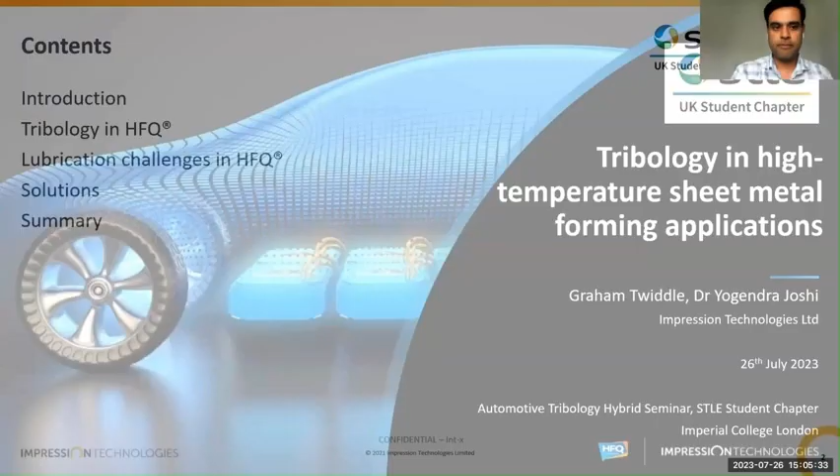So we will just give the introduction about the company and the process. Then we'll look at tribology in HFQ, which is our patented process. Then I'll share some challenges that we are facing at the moment. And then Graham will pitch in and then talk about solutions. And then we'll just give you a brief summary and open to any questions and discussions.

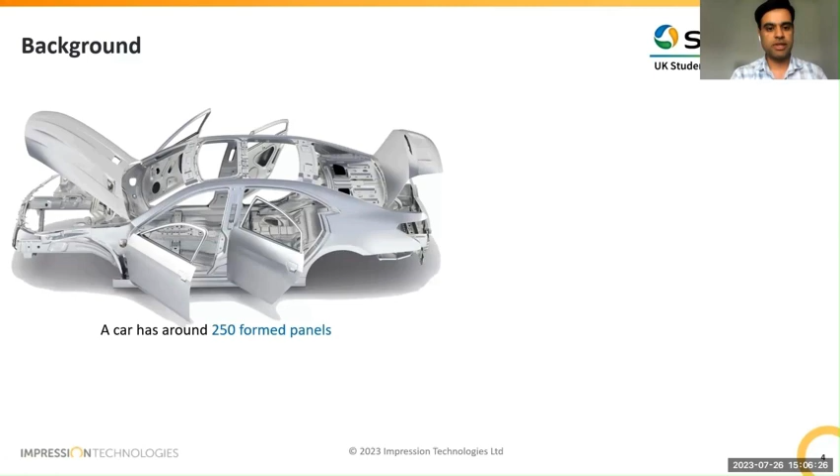So we have been talking about automotive tribology. So a car has around 250 formed panels. That includes what we see outside, as in bodies, doors, hoods, inners, fenders, plus the components that go on to make the chassis. And more recently, there have been a lot of discussion on how to make chassis for electric vehicles, which is a completely different game altogether.

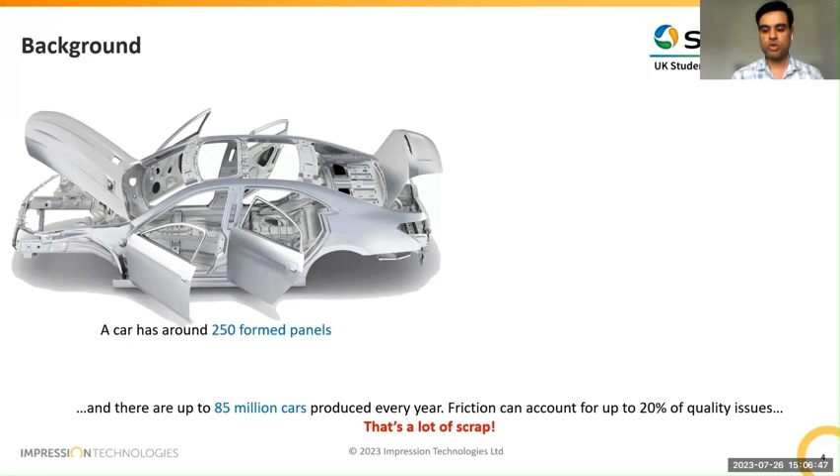On an average, there are 85 million cars produced every year. And like Ian mentioned on Josh's report, friction can account up to 20% of the quality issues. And the number is roughly the same in automotive stampings, but more so, let's say, towards 20 when it comes to these novel processes such as hot form components.

So as we are moving towards much more advanced processes, tribology becomes more important, and reducing the friction accounted losses in terms of scrap is also more important, more so in terms of sustainability, in reducing less material. There is no point in lightweighting and then using more in scrap.

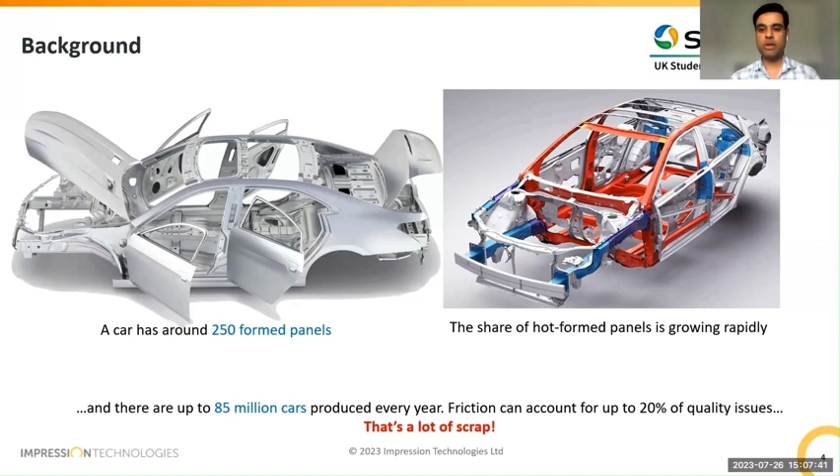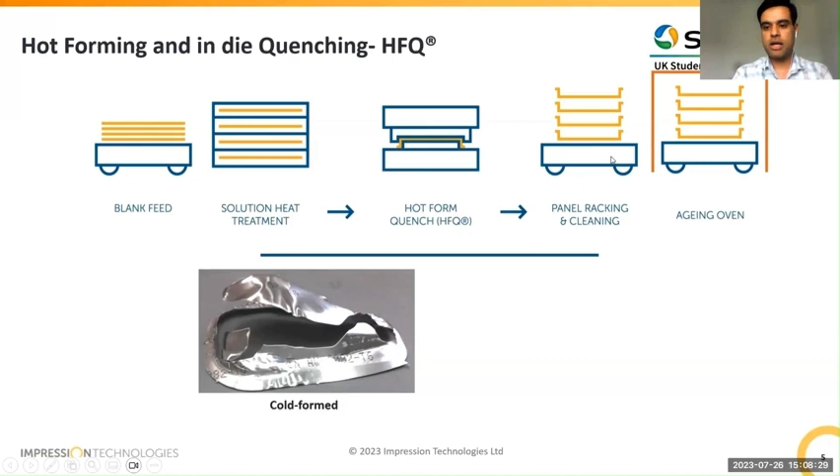Then the blanks are rapidly transferred to a cooled die. So there's a male and a female cavity. And then the press comes down, it forms the part. At the end of forming, there is a dwell of a few seconds to suck the heat out so that the part comes out at room temperature. Then the parts are cleaned, and then it goes into an aging oven where we get final properties.

And here I've just shown two examples: if I were to form this part cold using high strength aluminium, it splits into two. But if I do it hot through our process, we can make a very good part without any defects such as thinning or wrinkles.

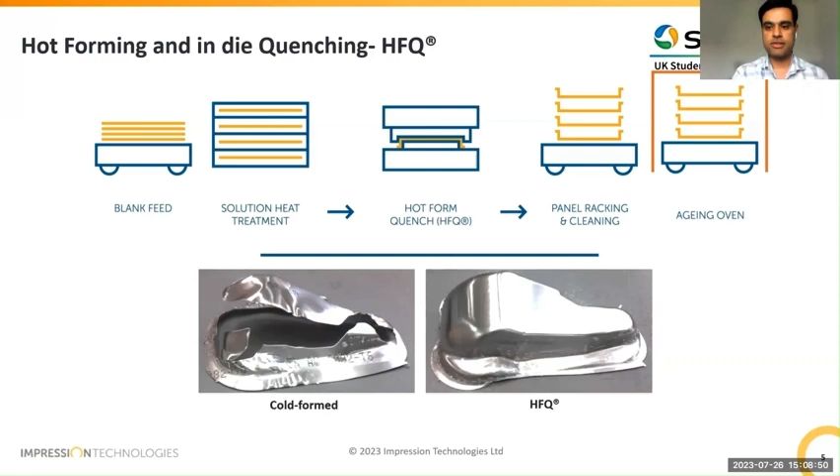So here I just want to show you the process in action. And this is in our site in Germany.

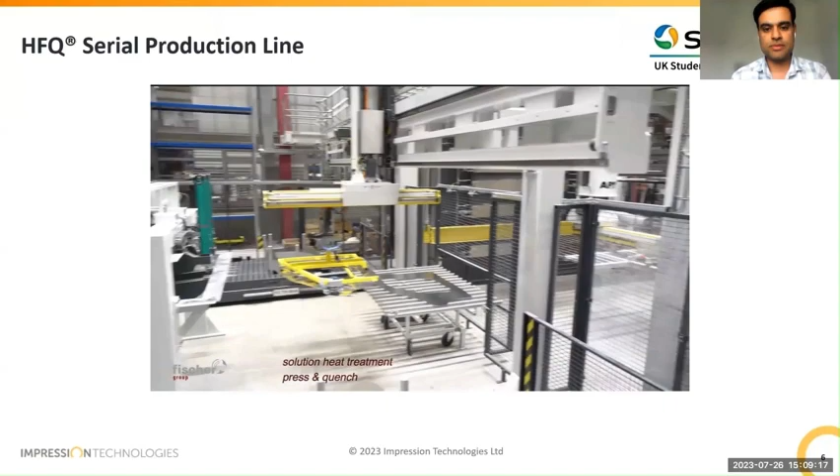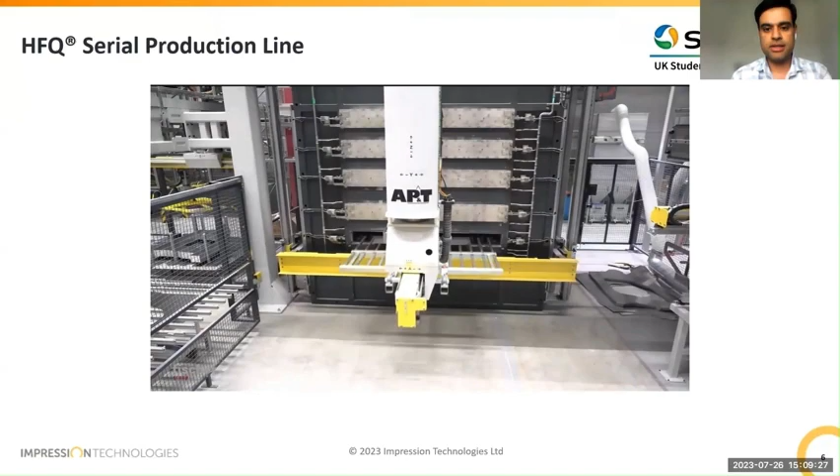This is where the blank is taken into the furnace for solution heat treatment. And the component being formed is a door ring, so that's where the door is latched onto.

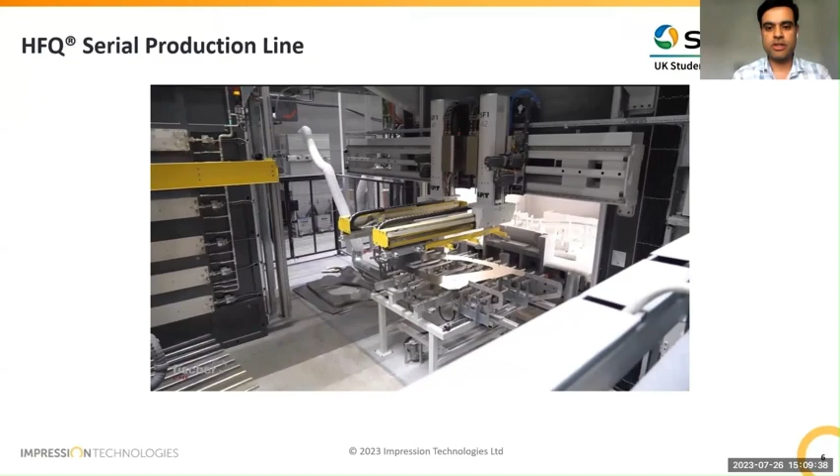Now it's out of the furnace and going inside the press in dies, and it's being formed. And after the quench time, it's removed from the press.

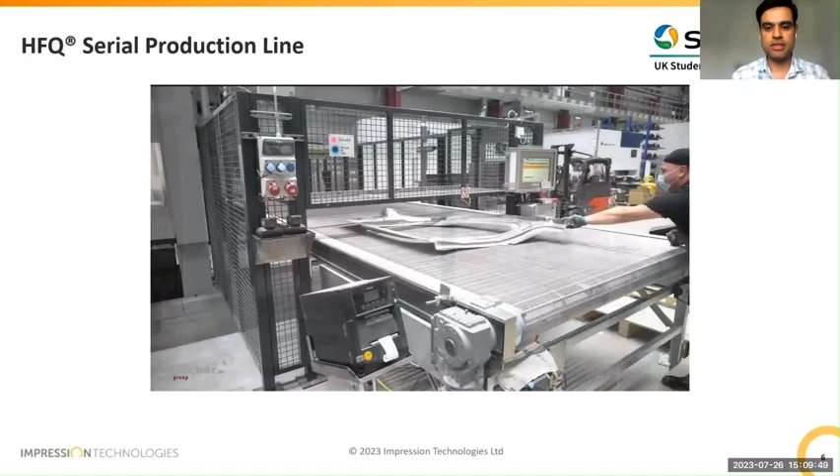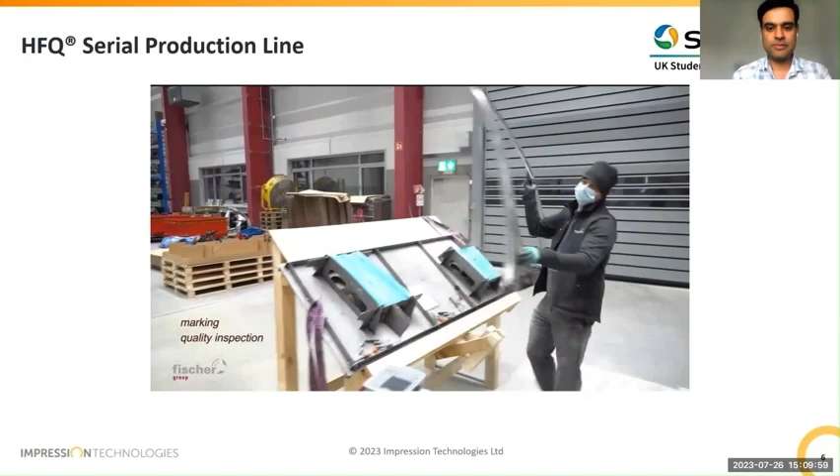It's visually inspected, and then it's stacked. That goes on for cleaning.

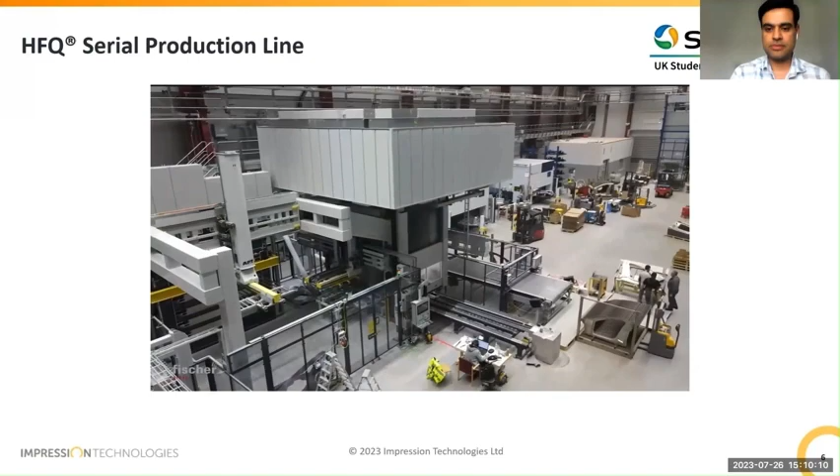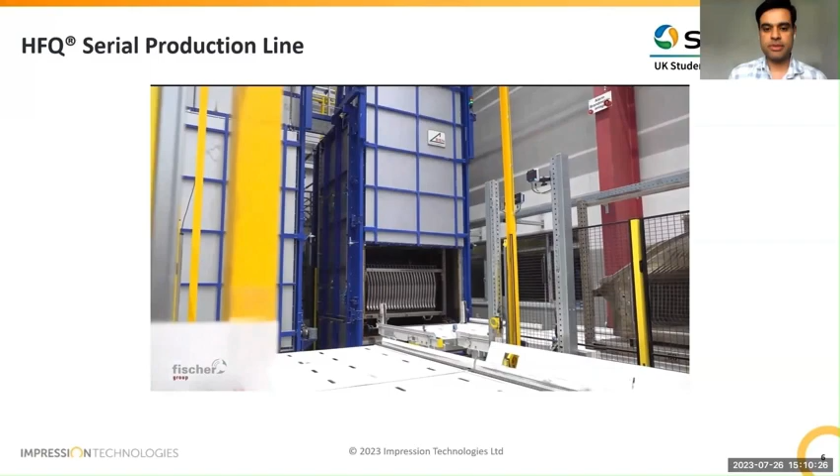Once it gets into the aging, where it gets the final property, so it's moving inside an aging oven. That's the advantage of HFQ, is you can tailor the final properties of the part depending on where it sits and what are the mechanical property requirements.

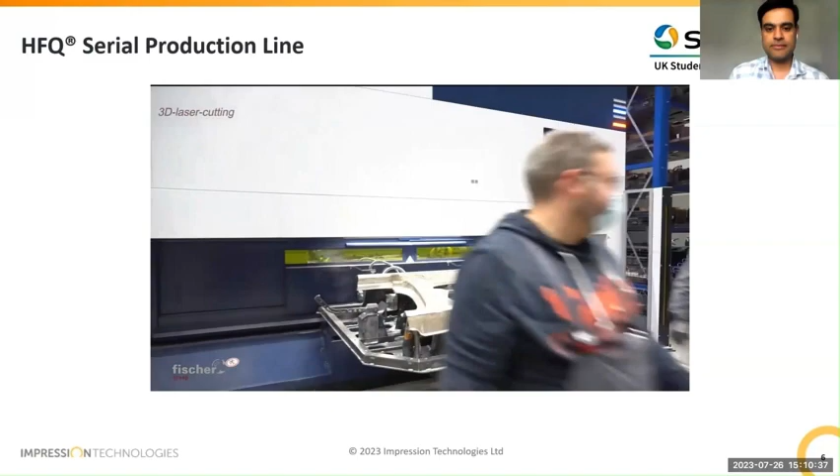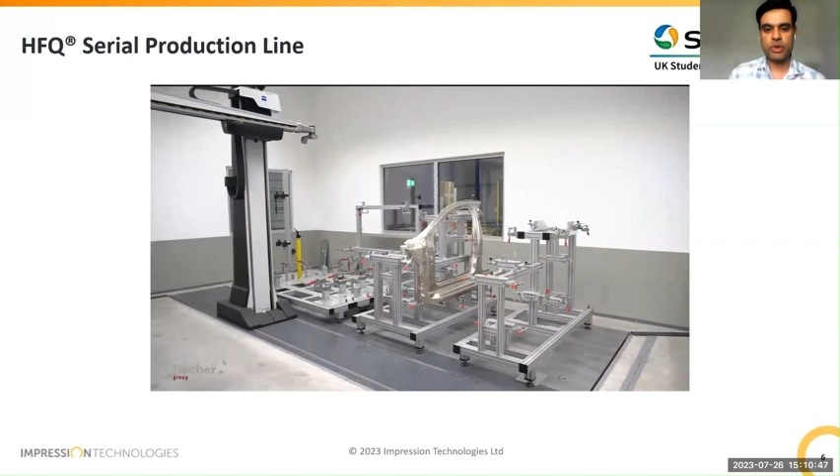And now it goes for laser cutting to the final shape. That's now cut and stacked, and this is how we measure. So this is where all the quality issues on dimensional conformance, thinning are being measured and captured.

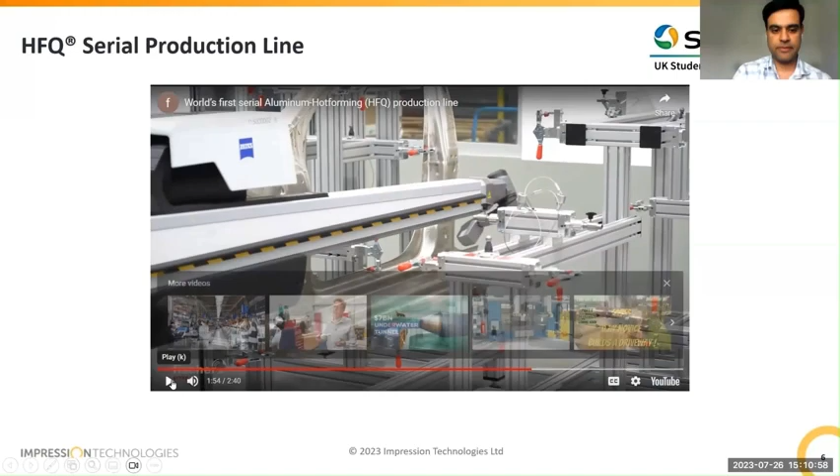Hopefully that gave you the idea of what the process is. So as a company, we only focus on ultra-high strength aluminum alloys through our patented process called HFQ. So far, we have invested 35 million in developing the technology. And at the moment, it's being used in companies like Aston Martin, Lucid in the US, and Lotus.

We have been commercially producing parts since 2016. So there are around 39 different parts being produced as we speak, and an annual production volume of more than 250,000 parts. And in terms of our interactions with global OEMs, we are working with almost every single OEM in aerospace and automotive you can imagine.

And we are based in Coventry, which is the automotive hub of the UK. And we operate from our technology headquarters in Coventry.

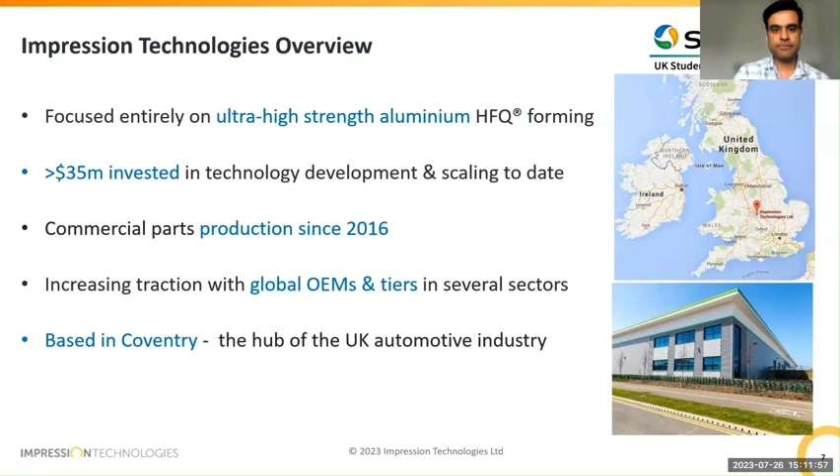So let's get into the interesting bit now. Let's talk about the Tribo system when it comes to sheet metal forming and especially HFQ. So there's a hot blank in between, and then the upper and lower tool, which are going to form the part.

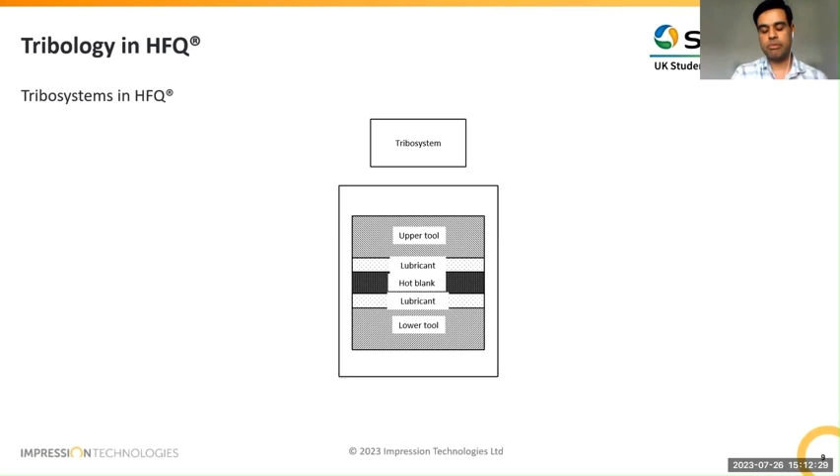In HFQ, we spray lubricant on the tool, so the blank does not come with any lubricant. And then the tools could be of tool steels, cast iron, or any other ferrous materials, which can also be coated with PVD coatings.

And then there are a plethora of operating variables depending on what type of motion, type of blank, process parameters such as forming forces, sliding distances, relative velocity. More importantly, the temperature of the die and the part. And both the blank and the die come with a certain surface finish. And then finally, the viscosity of the lubricant. So there are quite a few operating parameters that influence the Tribo system.

And the tribometric output, essentially what we all measure in tribology across different fields, is coefficient of friction and wear. But the friction coefficient is a function of the friction force, which is in turn a function of asperity flattening, adhesion, and shearing. Because we are looking at a high temperature contact, there's oxidation both on the steel, on the lubricant, and on the aluminum blank.

And there's also some dynamic effect to lubricants, such as squeezing out of the contact. And all these aspects together influence the contact conditions. And after we start pressing one part to the other, the entire Tribo system is then developing. So it's a rather dynamic nature of the Tribo system that we encounter in sheet metal forming.

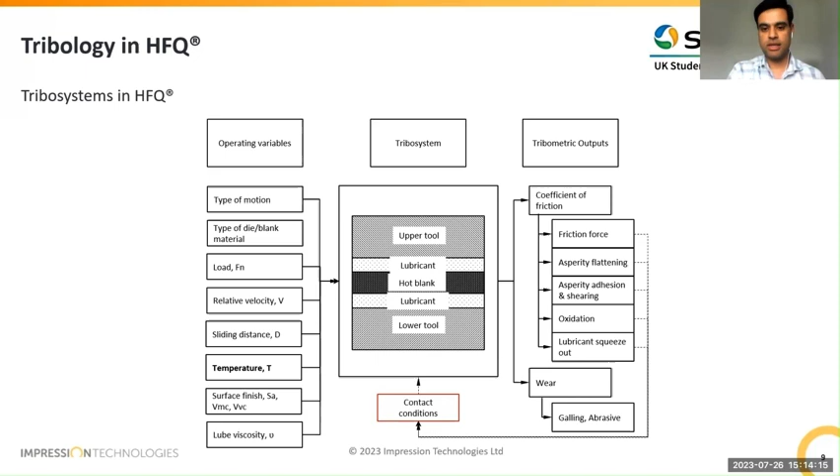So what is different to other tribology domains here is that the contact is non-recurring, that the blank and the tool only come in contact with each other once. Then there is an area contact rather than line or point contact. And the contact pressures that we experience are in megapascals, so let's say up to 50 megapascals on average, rather than in gigapascals. So the contact is very different.

And so what happens on a micro scale is I've tried to explain here. Talking from left to right, so you have only one side of the contact. There's an aluminium oxide layer. So imagine if an aluminium blank is being solution heat treated, then the oxide layer, there's an oxide layer growth that is happening, and then that layer is also porous.

When the die comes in contact with the aluminium blank, which is not lubricated, then there's an exchange of lubrication. And then when there's sliding action, when the part wants to form, then there are a lot of things happening at the same time. There is breaking of the brittle aluminum oxide layer, which can lead to extrusion of the base or softer aluminium alloy, which then can come in contact with the tool steel or the tool surface and get, let's say, chemically or mechanically adhered, which is galling.

And then there are some broken off abrasive particles of aluminium oxide or of the tool surface as well, because aluminium oxide is the second hardest material. So it can also wear and remove particles off the tooling surface. So an entire contact is evolving as we are forming.

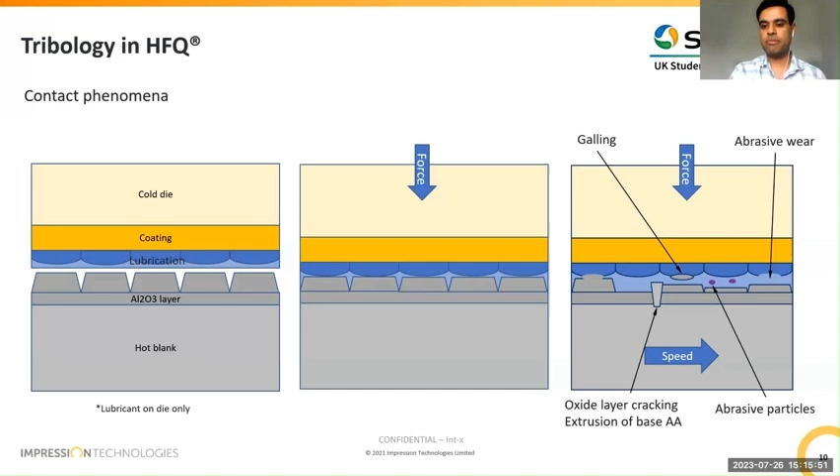And at the same time, the blank is cooling and the die is gaining temperature. So again, the temperature exchange also affects the rheological properties of the lubricant, which in turn changes what is happening at the contact. And all of this is happening within less than 1 second.

So I'm just now trying to make you more aware of what challenges such a contact can bring in. So the first challenge is the evolution of contact and friction. If you look at a Stribeck curve, which we all know, it divides into 3 lubrication regimes. In sheet metal forming, we have these parameters called L1 and L2, which is an extension of the current Stribeck curve, but we account for surface finish in it. So we typically only operate in boundary and mixed lubrication regime. We rarely go to hydrodynamic lubrication or EHD in that regime.

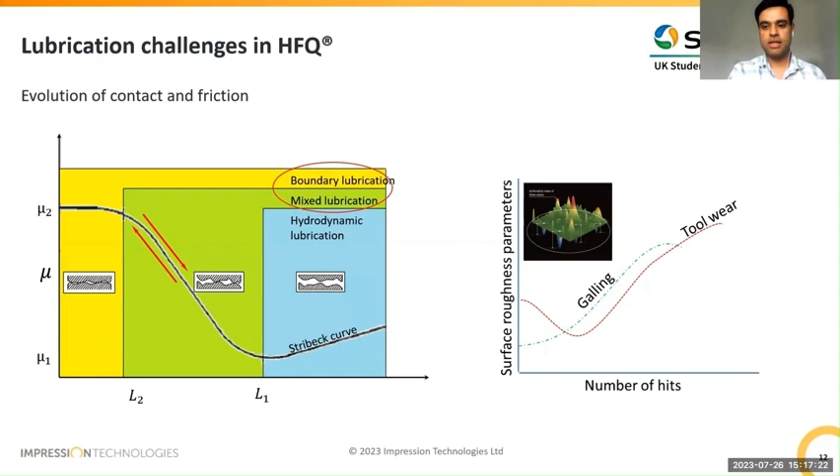But what can happen with the contact that is constantly evolving is, depending on the lubricant, the type of aluminium blank, and the forces and speeds that are used, the friction can either increase or decrease during that contact. And that is a dynamic nature that is very hard to predict for some tribo systems. Then, as we keep pressing the parts, let's say we press 4,000, 5,000 in a production run, galling, which is adhesive wear, also kicks in. Then tool wear also kicks in. So even between the number of hits and time over the production, the contact is evolving. So the friction is evolving, the contact is evolving. So how do you then quantify a system like this?

Then the other challenge is what experiments to conduct. If you look at a part being formed, as you can see here, there are different types of contact. There is bending over tension, there is sliding, there is bending and unbending over a feature, and in the die gap there is ironing. So there are around 9 tests to characterize what is actually going to happen while forming just one part. And all of these are still macro scale, and they don't really represent the real production conditions.

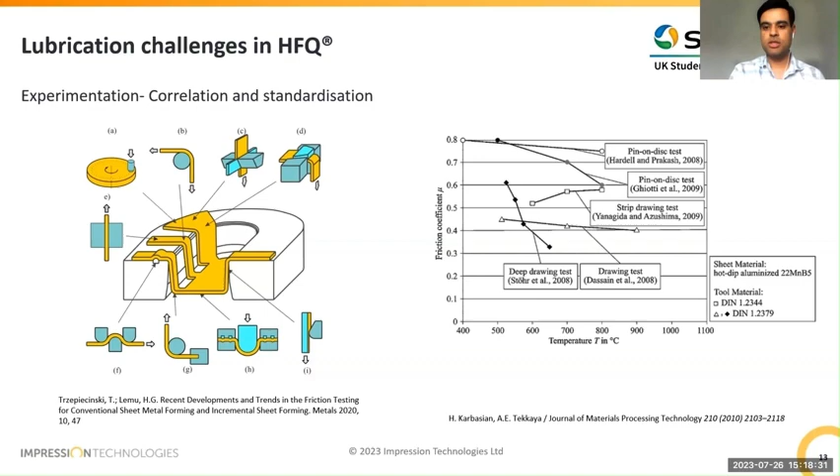So which tests to use to quantify what is really going to happen in production is still a problem. Then on the right, I've shown some research that has been done on steel, in which different universities and authors have tried to replicate each other's tribology tests. And what you can see here is that no 2 tribology tests in this field are repeatable. So then what data to trust and what tests to trust?

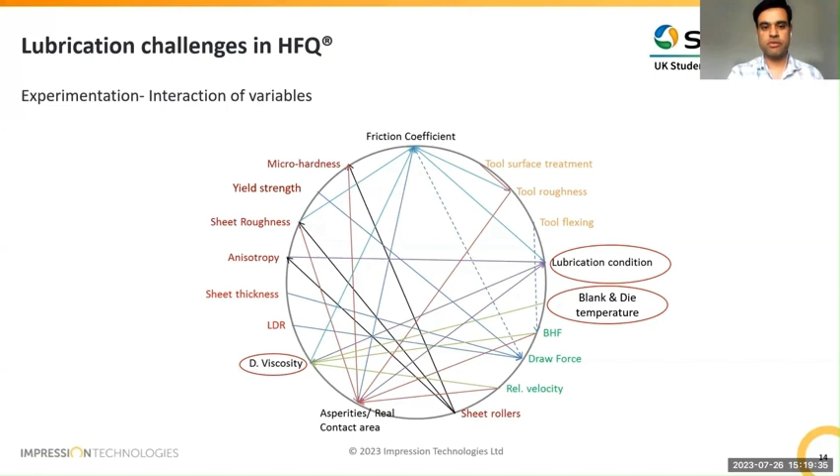So that brings me to what should be the properties of the lubricant. The three most important properties, which are probably common with lubricants in other fields in tribology, start with frictional behavior. So we want the friction to be predictable, constant and consistent. Then, because we are trying to lose heat, the lubricant should help us lose heat as rapidly as possible, so it needs to have a high heat transfer coefficient. And finally, the lubricant should be able to stick or adhere very rapidly to not only the tool steel that is being sprayed onto, but aluminium. And that can either happen through adsorption or with some reaction elements.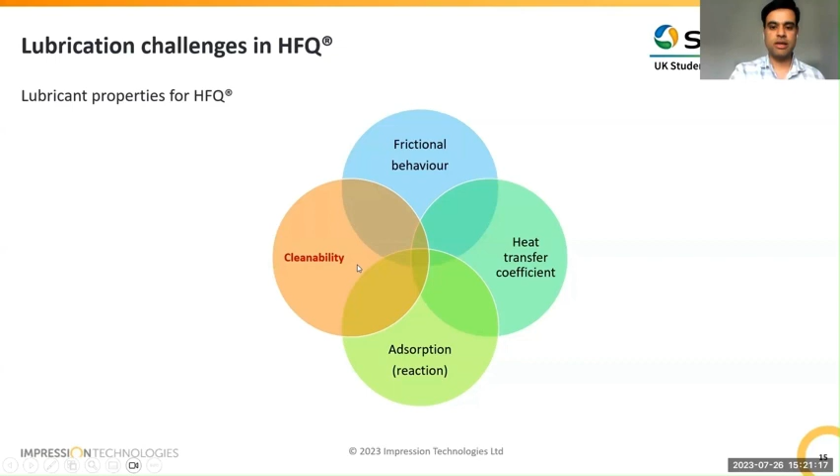And all these aspects are being researched in the EU and in America mostly, but the UK tends to not have much research on sheet metal forming, which is one of the reasons we are trying to introduce this field to us. But more importantly, what generally is lost in research is the cleanability. There is no point in evaluating and trialing a lubricant that can be good at friction behavior and heat transfer coefficient, and does the job, but it cannot be cleaned after the part is formed, because it gives you a lot of surface quality issues. So it's not directly linked to tribology, but Graham and I try to work on formulations which not only give us good frictional response, but good cleanability as well. Because eventually we want clean parts to be sent for painting.

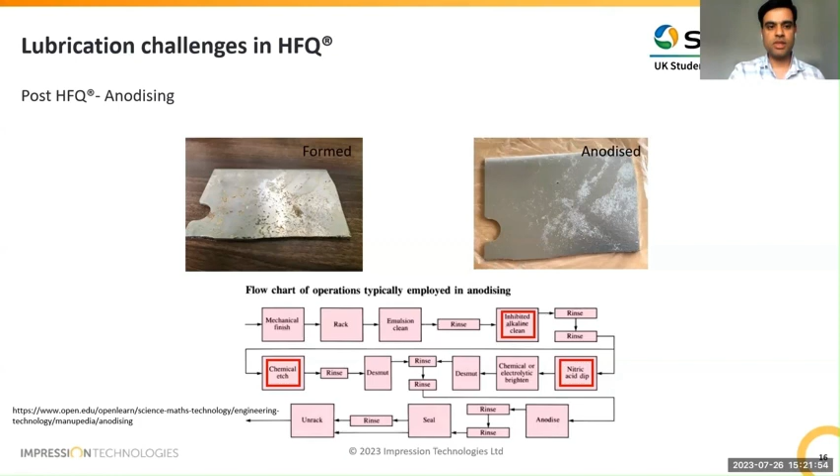So these are the challenges that we face, and then we are trying to surpass. Graham will take you through some of the solutions. Over to you, Graham.

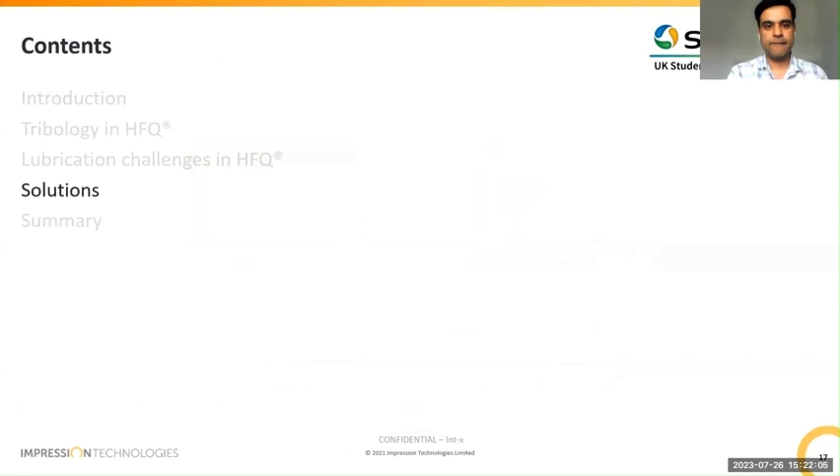As I was saying, I've been working in the metalworking industry, metalworking lubricants industry, for about 40 years. I first came across this process when it was in its infancy at the University of Birmingham, probably about 10 or 12 years ago, and got involved.

Then I joined Impression Technologies about 6 years ago. One of the issues we've always had is, because it's new, there were no industrial lubricants out there that were formulated for this process.

Cold aluminium forming, there's loads of lubricants. It's been going on for donkey's years. Hot aluminium forming, forging, extrusion, again, lots of lubricants out there.

The difference between these processes is in aluminium forging, you've got a warm or hot blank and a die which is maybe around 50 or 100 degrees C cooler than the blank. With cold forming, everything's at room temperature. What we've got here is a hot blank, which is in excess of 400 to 450 degrees centigrade, and we've got dies that are cooled to room temperature.

The production dies that we're making now are water cooled. So you've got this big temperature gradient, which you need a lubricant to survive and help you make the part, and then you've got to get it off the part and also get it off the dies afterwards to do the die maintenance. So this will take you through some of the solutions that we've been working on.

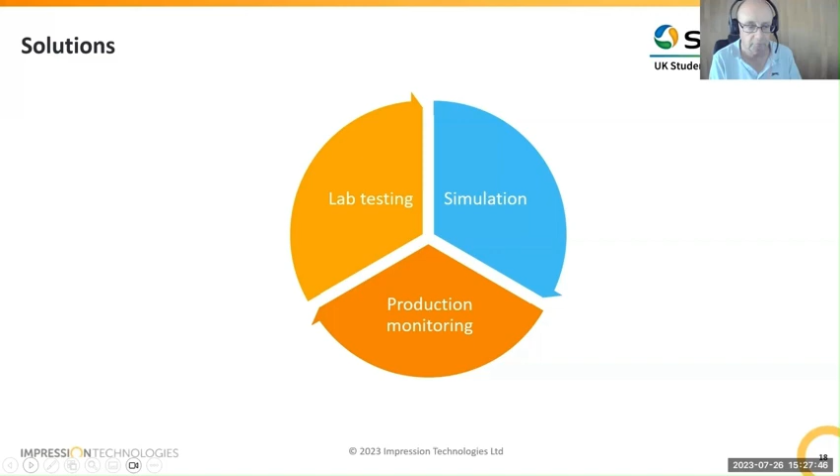The most effective lab test that we've got running on a regular basis at the moment is that we have a small cross die tool that we use. We can make these dies from any material that we can, all the same materials that we make production dies with, and we can also coat them, PVD coat them with various coatings, and we can see the effect of those along with different lubricants.

We did originally design these so that we could actually cool them, but the rate that we actually run the tests is, generally speaking, much slower than the production run would be. So the dies tend to come back to room temperature between each test anyway.

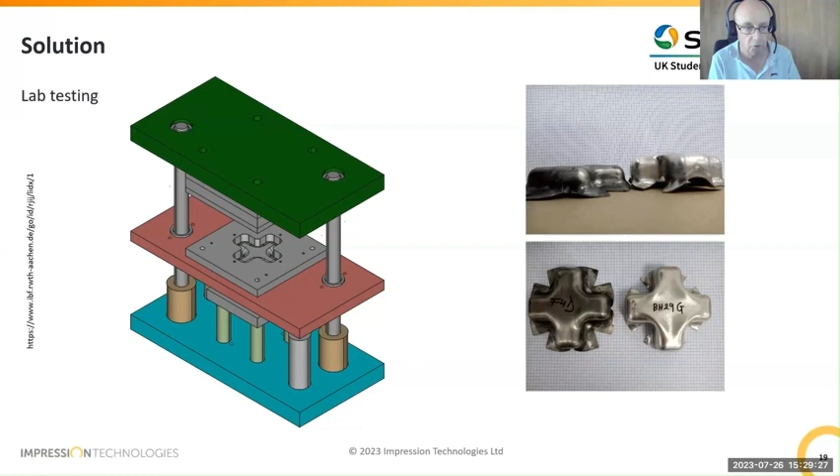On the left hand side, you've got a schematic of the tooling, with the punch at the bottom, with a blank holder plate, which we sit the blank on, and then the die comes down from above, and we can measure the load on the press. We run at the same temperatures and speeds as we do in production. There's examples of some of the parts that come off that particular tool on the right hand side. We can measure depth of draw, and we can also take the load data and plot load against draw and rank lubricants that way.

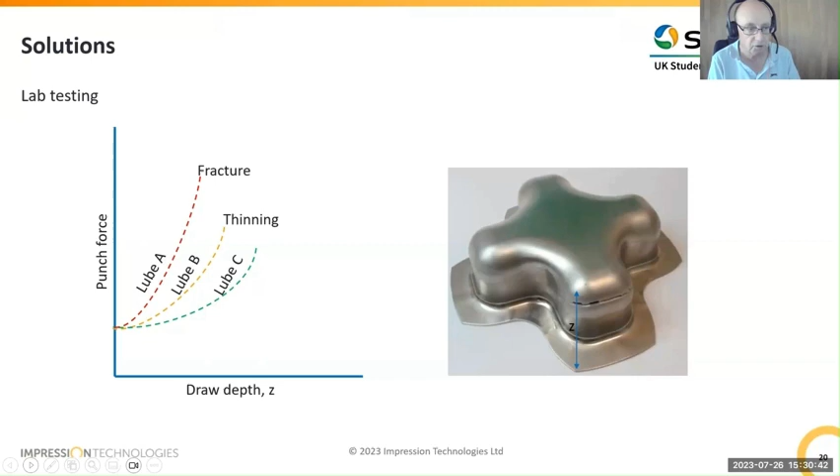Again, we can predict more accurately with this data where the thinning is going to occur, where splits might occur, where we need to apply lubricant, and where we don't need to apply lubricant in some cases too, which can be just as important. Reducing the friction where you need metal flow is one thing. Increasing the friction where you don't want it to flow is often just as important.

If needs be, we go back to the OEMs or whoever we're dealing with, discuss what certain issues are that we're having, and sometimes they will agree to a slight design change so that the part can be more easily made.

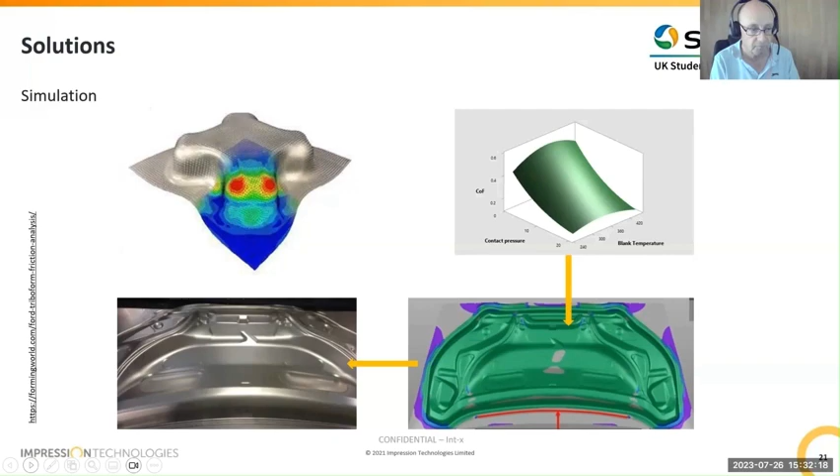What we need to do in that case is either remove the lubricant buildup in that area, or ensure that we're not spraying lubricant in the area where it's not needed so it doesn't migrate into there. We can also see a similar effect sometimes if we get less than optimum blank material delivered to us. So it's not just us working on the tribology side, but we also need the guys doing the work to ensure we've got the correct materials coming in the first place.

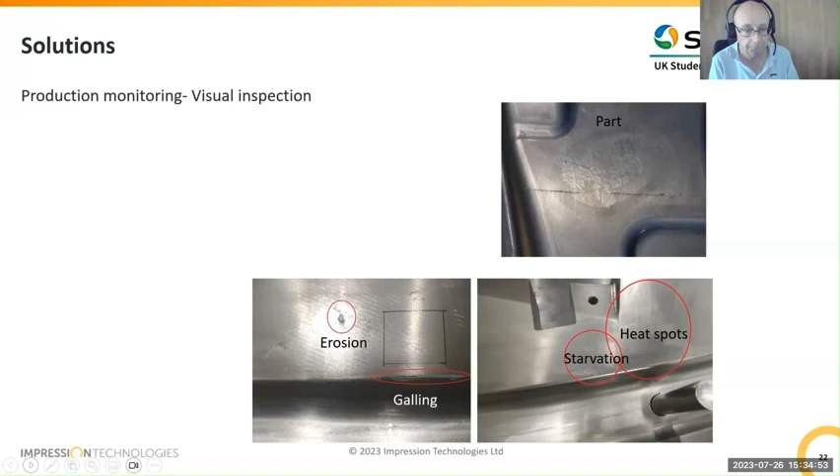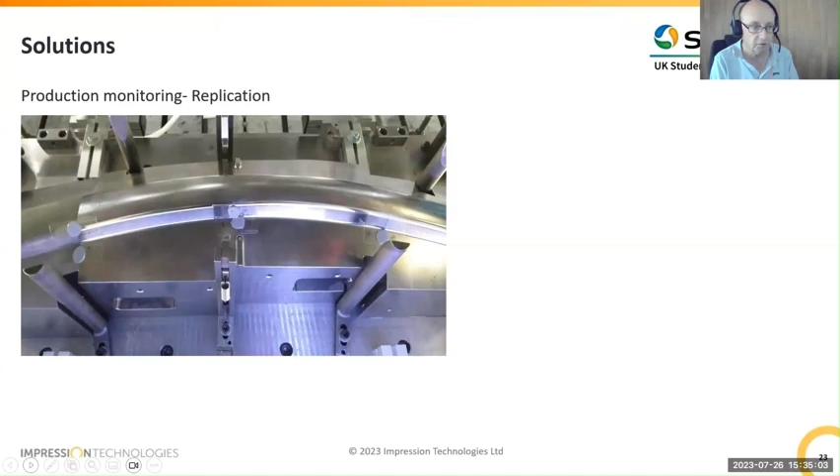Next, to monitor the dies, another thing we do is monitor the surface over a period of time, and we do this using 3D profilometry. Now, it's not the easiest thing in the world to take a die which is maybe 2 meters long and 1.5 meters wide and drop it onto the bed of a 3D profilometer.

So we have to do that by taking replicas at various points during the process. And as long as we're reasonably consistent in where we're taking those replicas from, then we can monitor how the galling or any other wear taking place on the tool surface occurs. Like I said, for the most part, what we see is aluminium oxide transfer onto the die surface, which is what we call galling.

And the best way of removing this is with a detergent caustic solution, because that dissolves the aluminium oxide. They're like little ball bearings, but they're adhered quite strongly to the surface of the tool. And if we dissolve those with a caustic soda solution, then we get back down to the original metal and also the original surface finish of the metal.

Whereas if we were to try and abrade those off, then we would be changing the surface finish of the tool itself, which could lead to galling coming on at a much more rapid rate. And in addition, if we've got a PVD coating on there, then we would be removing it within a few short runs and having to send the tool back for another expensive recoat.

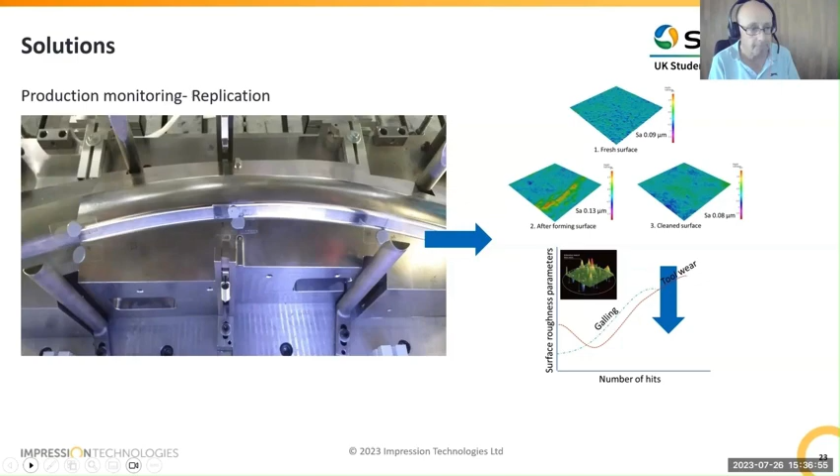Okay, Yogendra. So in summary, using tribology, and the knowledge of lubricants and working with lubricant suppliers, and also working with tool material suppliers and PVD coaters, tribology is a key enabler, or has become a key enabler in helping us to harness the advantage of HFQ in an industrial hot forming application.

Aluminium alloys themselves, high strength ones in particular, pose significant challenge in terms of the tribology and the lubrication system that develops during production. The main challenges arise due to the presence of aluminium oxide layers, which can form on the tooling, and we require relevant experimentation to develop a lubricant system.

And just to cover that a little more, one of the main issues with typical tribology test equipment that's out there is that you pretty much got to run the tool material and the blank material at the same temperature, which isn't what happens in the industrial process. So that means you've got to run multiple tests at multiple temperatures, pressures and speeds in order to try and get an overall map of what is going on in terms of coefficient of friction and other lubrication regimes taking place.

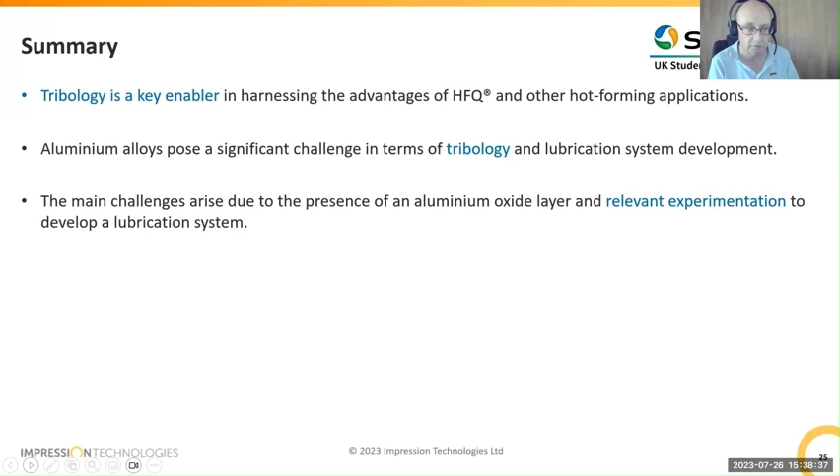Finally, taking this from the original academic process, we've managed to scale this up to a point where quite large production parts and real life production parts are being made, but the true reality of it is that there's still quite a lot of R&D needs doing to further promote this.

The lubricants that we're typically using at the moment are graphite based, and the industry that we're selling into is not really used to using graphite based lubricants. So there's a lot of work going on to try and remove the graphite and replace it with other lubricant bases, not just base fluids, but also additives to remove that solid lube.

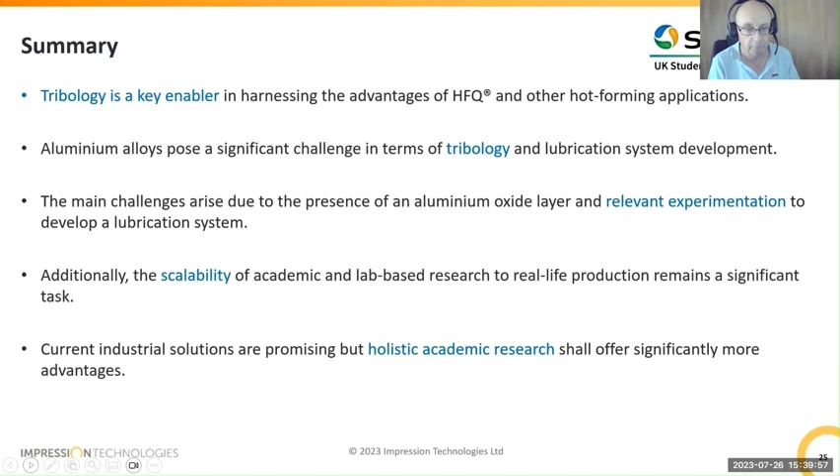And whilst our current solutions are promising, we still need quite a bit of research to take place, not only within ITL, but also within academic research facilities, so that we can better realize the true advantages of this process. That's our little talk for today.